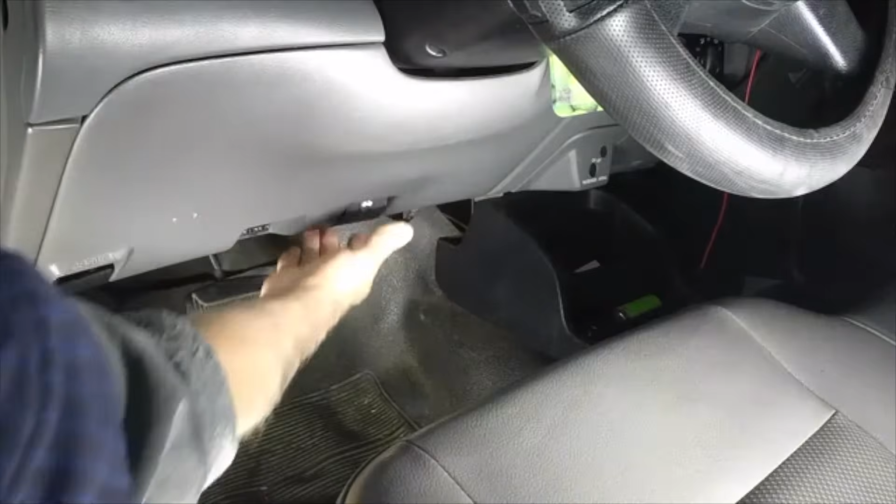Fluid level checks, Ford Ranger. Pull the hood release lever located underneath the steering wheel. Lift the hood safety latch and raise the hood upwards. Support the hood with the prop rod.

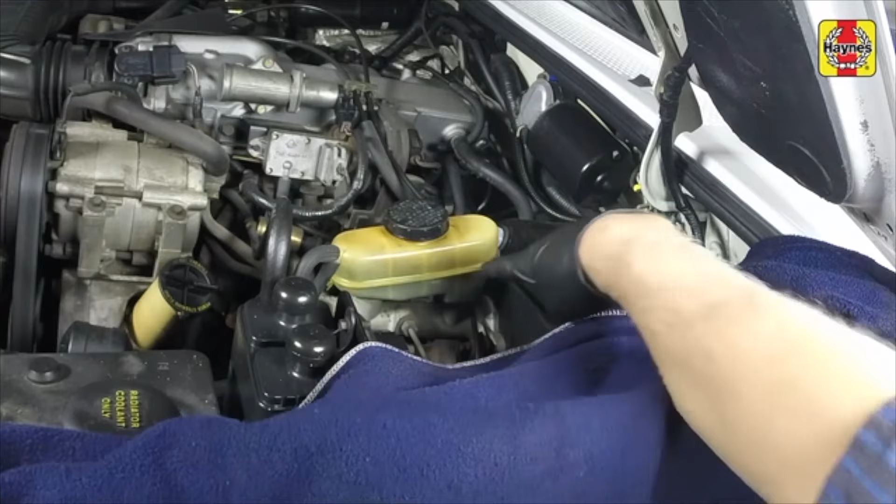Brake fluid level. The brake master cylinder fluid reservoir is located on the driver's side of the engine compartment firewall. The fluid level should be maintained between the maximum and minimum lines marked on the side of the reservoir.

If the fluid level is low, wipe the top of the reservoir and cap with a clean rag to prevent contamination of the system when the cap is unscrewed. Unscrew the cap from the brake fluid reservoir. While the reservoir cap is off, check the fluid in the reservoir for contamination. If rust deposits, dirt particles, or water droplets are present, the system should be properly drained and refilled.

Top up the reservoir with the specified type of new brake fluid until the fluid reaches the maximum line. After filling the reservoir to the proper level, install the cap and make sure the cap is fully seated to prevent fluid leakage and/or contamination.

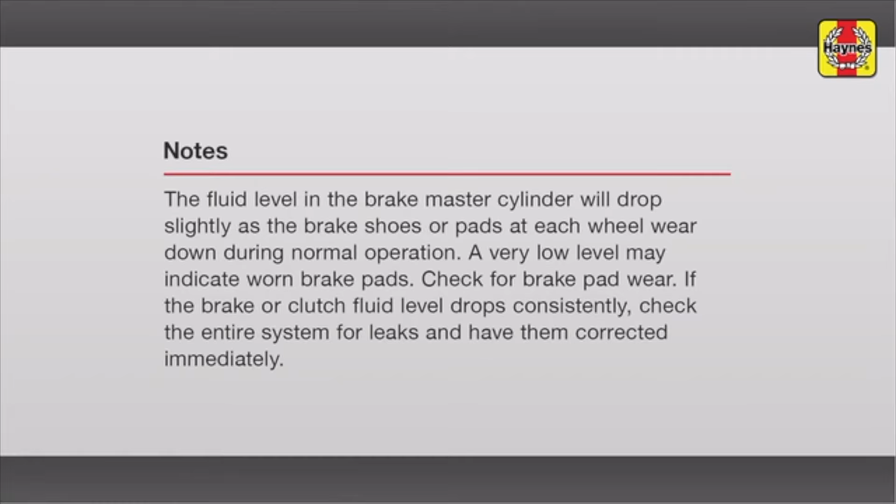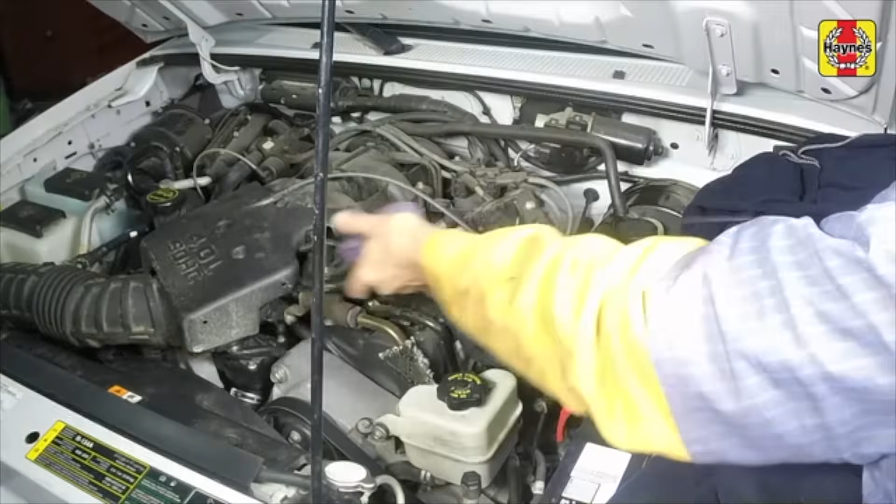Engine oil level. Pull the dipstick out of the tube and wipe all of the oil away from the end with a clean rag or paper towel. Insert the clean dipstick all the way back into the tube and pull it out again. Note the oil at the end of the dipstick. The level should be above the add mark and in the safe range.

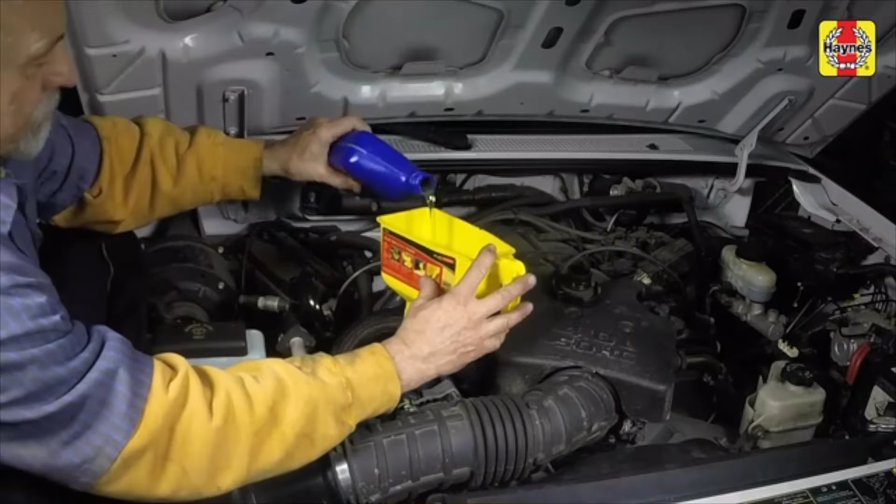To add oil, unscrew the oil filler cap and pour in the correct type of oil. Use a funnel to prevent oil spills. After adding oil, wait a few minutes to allow the level to stabilize. Then pull out the dipstick and check the level again. Add more oil if required until it reaches near the upper full mark. Do not overfill the engine. Insert the dipstick and install the filler cap, tightening it by hand only.

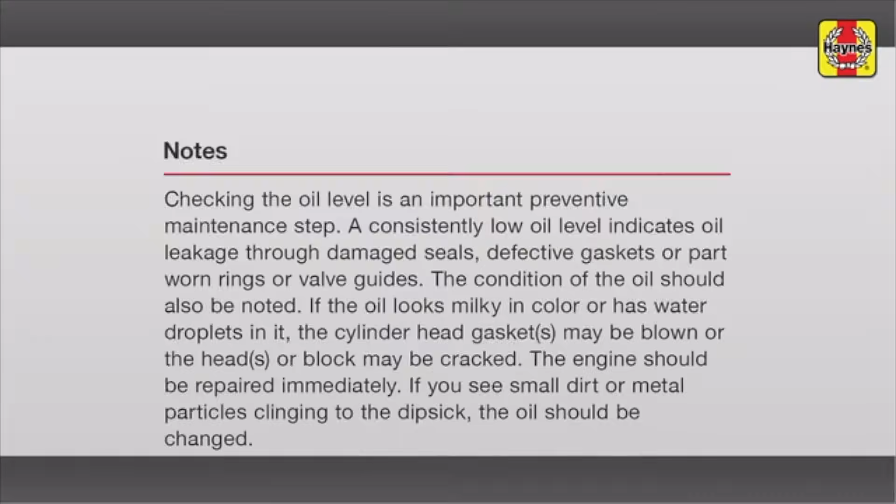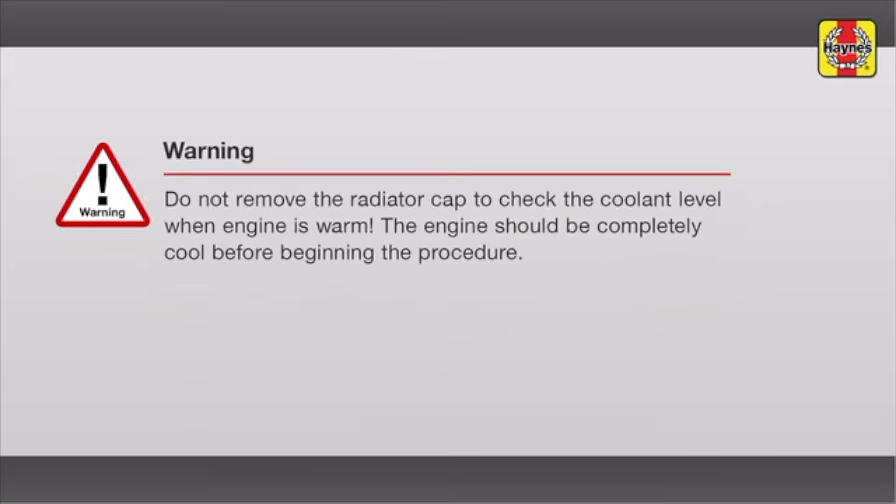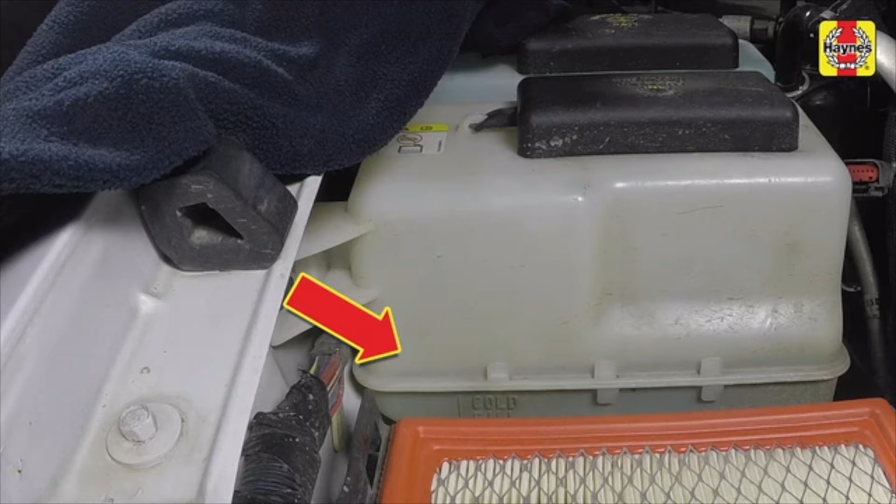Coolant level. The coolant level must be above the cold fill line printed on the side of the reservoir. The level will vary with the temperature of the engine. When the engine is cold, the coolant level should be at or slightly above the cold fill line on the tank. Once the engine has warmed up, the coolant level in the reservoir will rise.

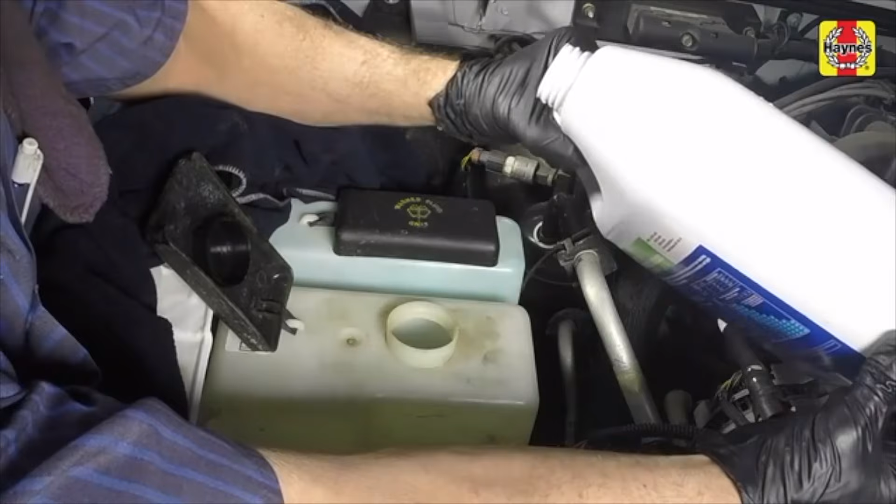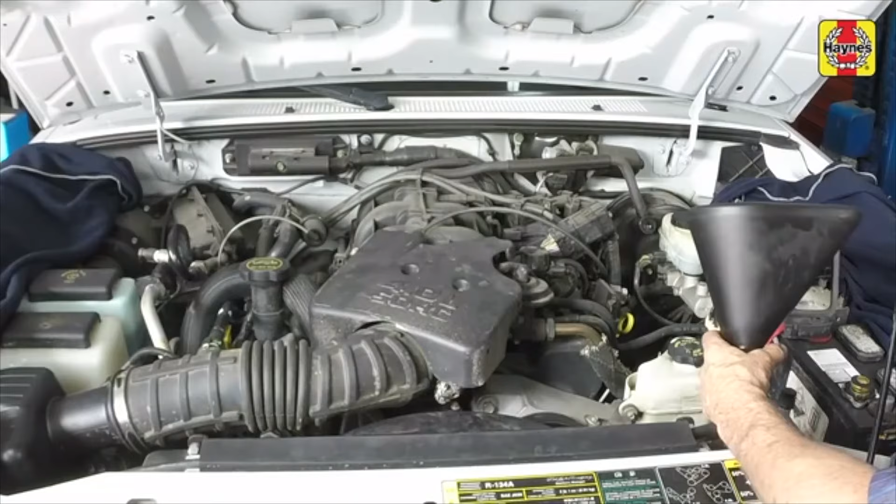If the level falls below the cold fill line, allow the fluid in the tank to cool. Then remove the cap from the coolant reservoir and add the correct type and mixture of coolant to bring the level slightly above the cold fill line. If it is necessary to remove the radiator cap, wait until the system has cooled completely. If any steam escapes, wait until the system has cooled further, then remove the cap. Add coolant to the radiator until it reaches the base of the filler neck.

If only a small amount of coolant is required to bring the system up to the proper level, water can be used. However, repeated additions of water will dilute the antifreeze and water solution. Install the radiator cap securely. Drive the vehicle, then recheck the coolant level.

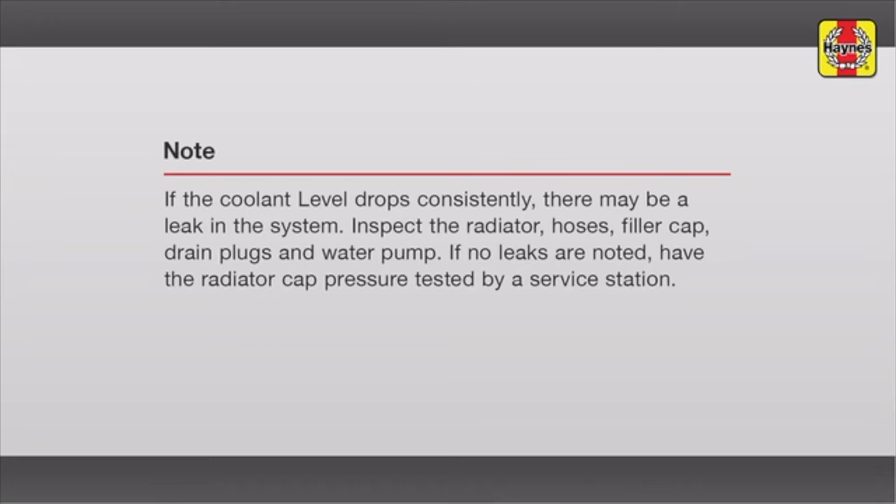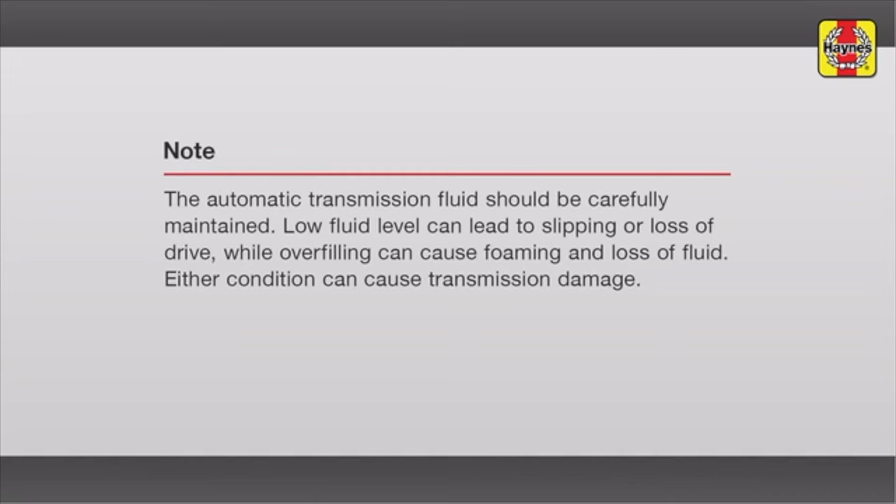Automatic transmission fluid level. Immediately after driving the vehicle, park it on a level surface. Set the parking brake and let the engine idle. While the engine is idling, depress the brake pedal and move the selector lever through all the gear ranges, pausing for a couple of seconds in between, beginning and ending in park. With the engine still idling, locate the automatic transmission dipstick in the engine compartment.

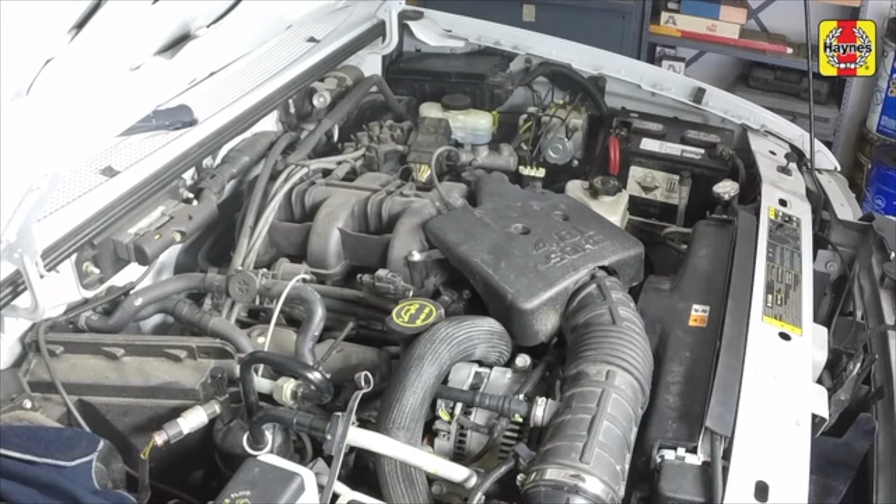Pull the dipstick out of the tube. Wipe it off with a clean rag, then push it all the way back into the tube until the cap seats. Pull the dipstick out again and note the fluid level. The fluid level should be within the operating temperature range or cross-hatched area with the transmission at normal operating temperature.

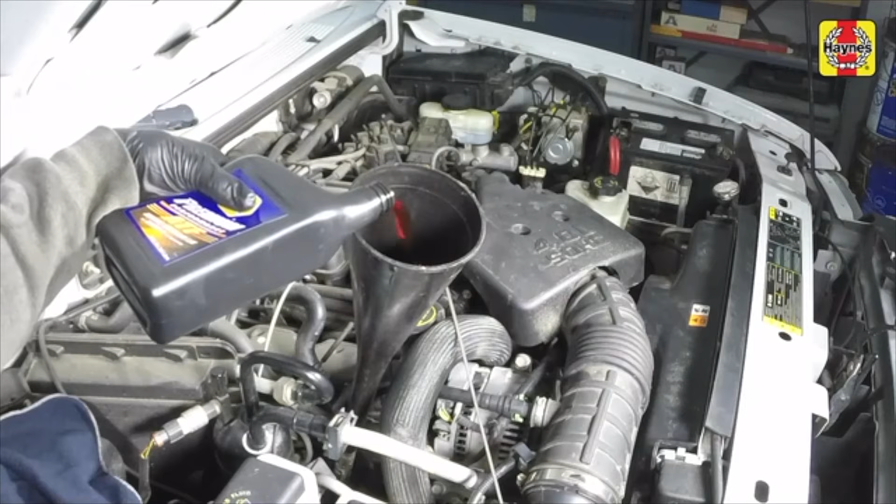If additional fluid is required, pour the specified fluid directly into the tube using a funnel. It takes about 1 pint to raise the level from the lower mark to the upper mark, so add the fluid a little at a time and keep checking the level until it's correct. Insert the dipstick fully into the tube. Turn off the engine.

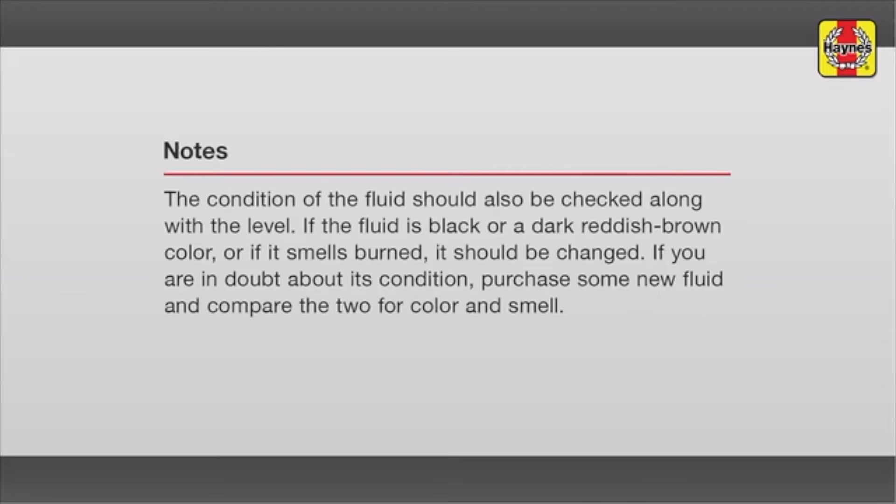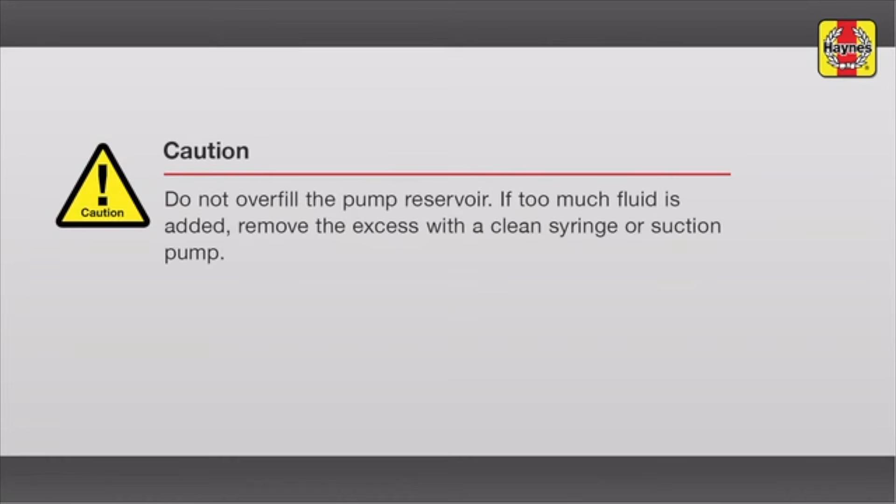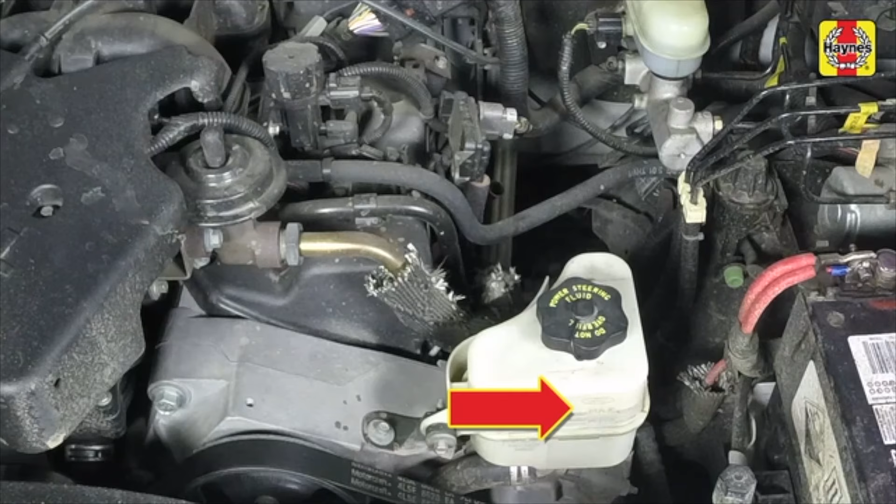Power steering fluid level. The power steering pump fluid reservoir is located at the left corner of the engine. The reservoir has maximum and minimum fluid level marks printed on the side. The fluid level can be seen without removing the reservoir cap.

If additional fluid is required, use a clean rag to wipe off the reservoir cap and the area around the cap. This will prevent any foreign matter from entering the steering system. Unscrew the cap, then add the necessary amount of the correct type of power steering fluid to the reservoir until the level reaches the maximum mark. Install the cap, tightening it securely by hand.

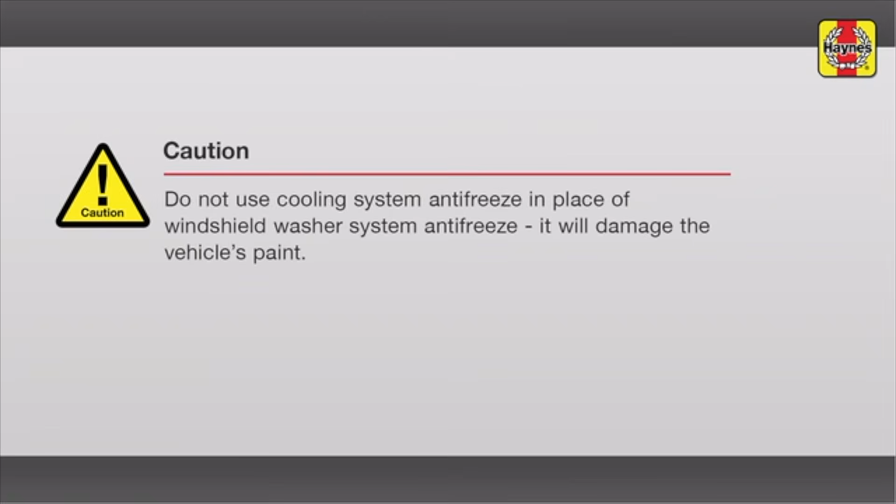Windshield washer fluid level. Fluid for the windshield washer system is stored in a plastic reservoir located at the right side of the engine compartment. Flip open the cap and fill the windshield washer reservoir as necessary. Push the cap securely onto the opening when finished.